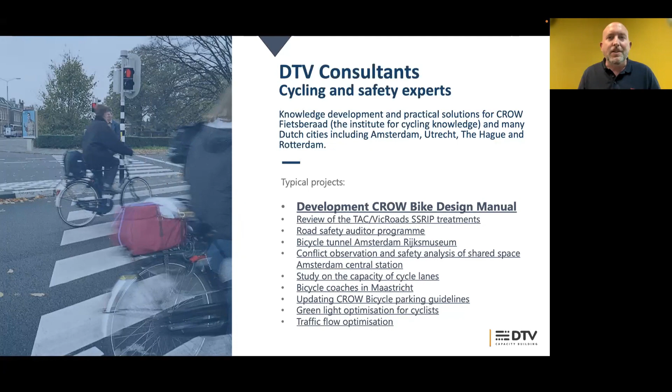We do a lot of studies in the Netherlands, Europe, and beyond. And one of the things that we combine this cycling expertise with is our knowledge to do trainings and knowledge sharing. So we have been doing trainings for professionals for more than 25 years now. So we combine didactical skills with our subject matter expertise. And we, in the end, create smiles, as you can see on this picture.

We are a member of the Dutch Cycling Embassy, so perhaps you became aware about this opportunity through their networks. It's an umbrella organization that collects a lot of knowledge and expertise, a lot of organizations, public, private knowledge, etc., from the Netherlands about cycling.

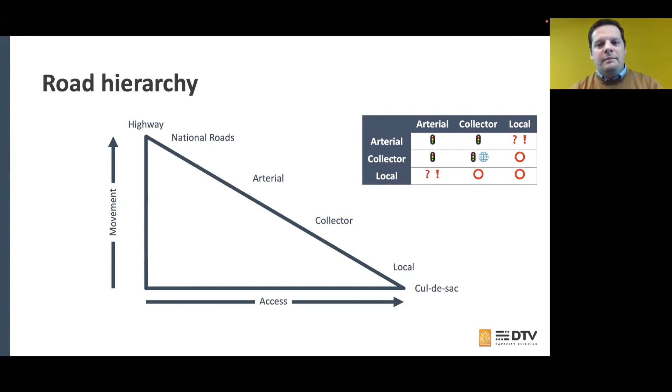And then local roads are smaller roads with less traffic. Normally, you wouldn't put a traffic light where two local roads connect to each other. But coming from Buenos Aires, as I said, the road hierarchy here is like a typical grid city, a typical American city. You can see roughly every 100 meters there's one road, mainly one-way roads.

And then in the top right, you can see the highway, the entrance to the city. And then you meet the first arterial roads. Then you meet the avenues, if we call them like that there. Those are mainly collector roads, and then all of the rest of the roads are mainly local roads. But what happens with the traffic light placement? Here you can see these stars that I put are the only intersections in this part of the city that do not have a traffic light.

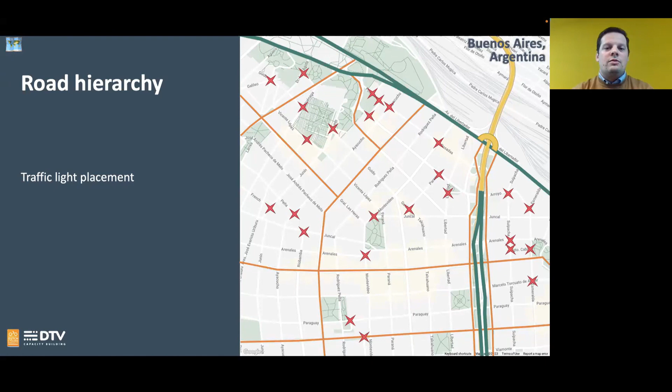So mainly in grid systems, the traffic light is mandatory or really necessary because it needs to handle traffic that goes every way. So here is a summary of where, in Buenos Aires and in many other grid systems like New York and other big cities, the traffic light is placed.

And in most cases it's pretty much everywhere because of the amount of traffic that goes through there, and also in a way the lack of road hierarchy, because any car could take any road, so all the roads become busy, and you need traffic lights to allow different vehicles to cross the intersection.

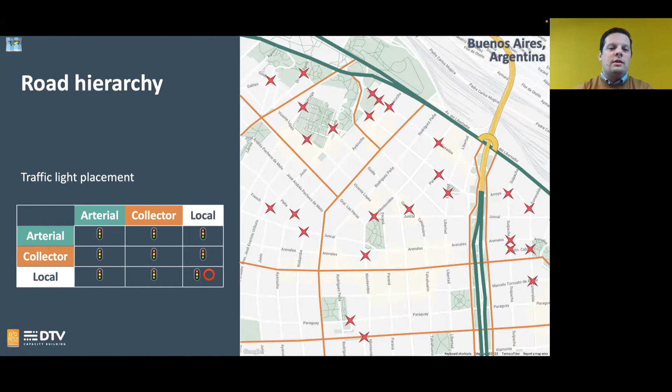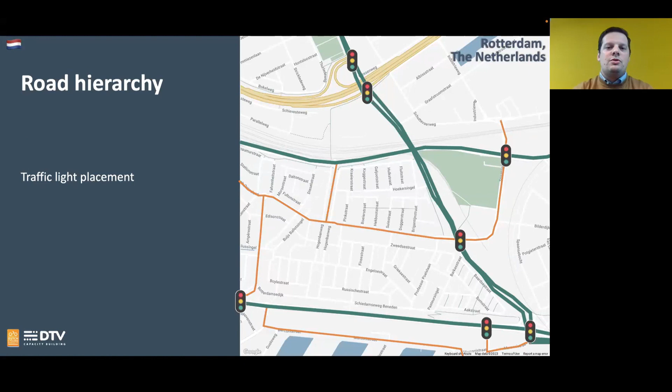So there are other big intersections, like a collector with another collector. And in those cases, there are other types of solutions, like for instance a roundabout or a grade-separated solution, as you see with the two arterials on the top right below the train tracks.

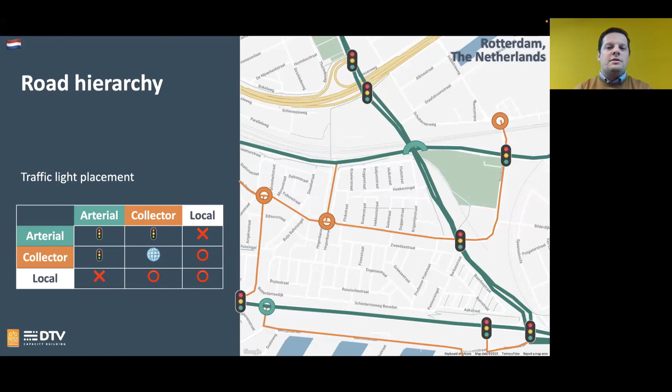So in the Netherlands, you have fewer traffic lights, further apart from each other. And of course, those intersections are bigger, more important intersections. So you need more robust traffic light regulation to handle this sort of intersection. So that's the idea behind the traffic lights of the Netherlands and the rest of the world.

Now, regarding the components of the traffic light, in the rest of the world you mainly have one traffic light for each direction of travel. It's not one per lane. So multiple lanes share the same traffic light, the actual light. Then in most cases, in the grid system, of course, left turns are not really possible at each intersection on each traffic light.

Usually we use the city loop: you take a right turn, a right turn, and a right turn instead of one left turn, because there are a lot more conflicts with left turns. And then there are mainly dedicated pedestrian lights where there is a pedestrian crossing.

And then, of course, at other, bigger or different sorts of intersections, you do have a dedicated left turn lane, and you also have pedestrian push buttons to ask for a green light for pedestrians. But this is not used at every intersection in the world.

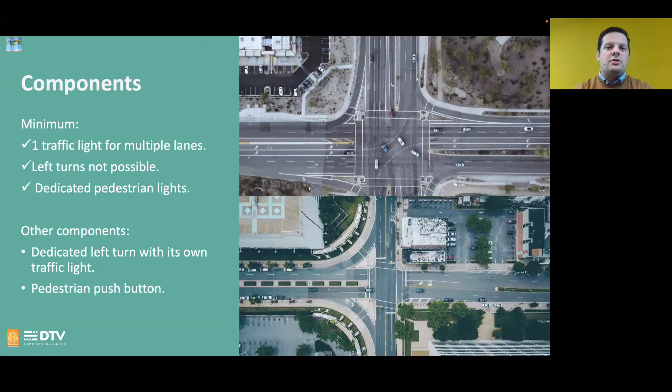But of course, going back again to the Netherlands case, you typically have one traffic light per lane. So each lane has one traffic light dedicated to that lane. We will look a little bit later at why you need one traffic light per lane. You tend to have dedicated turning lanes because, as I told you, these are more robust, bigger intersections, so you need more space to handle different sorts of traffic.

And also because the intersections are further apart, if you don't have the left turn, the route the vehicle has to take is a lot longer than with the normal grid. So it's really useful to have left turns. Then you always have dedicated pedestrian and bicycle lights.

So the traffic light knows when there is a vehicle approaching the intersection, how long has it been there, and what amount of vehicles are in each lane and what they want to do. That's also why you need dedicated turning lanes.

And then you have in all intersections also push buttons above the induction loops that also detect cyclists. You have push buttons for cyclists and for pedestrians. And then in the case that there is a high speed lane or something similar to that for buses and trams, you have a dedicated light for trams and for buses.

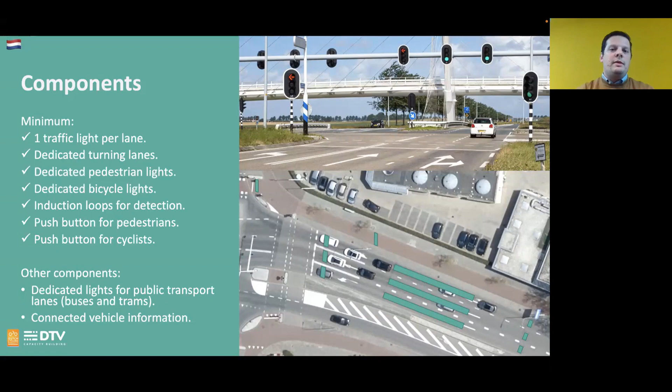And finally, with the new intelligent traffic lights in the Netherlands, you also have the ability to connect with smart cars. So the smart car sends a notification to the traffic light, and then the traffic lights know before the induction loops that this sort of vehicle is coming to the intersection. So that's also a huge difference with other types of intersections.

In terms of cycle times, as I told before, the grid is one of the main definitions of the system of traffic lights in main cities. What you usually have is big avenues, those are the yellow arrows, and then smaller roads in between. So what you need to do to get that system moving and not a gridlock, as it is called, you need to coordinate those.

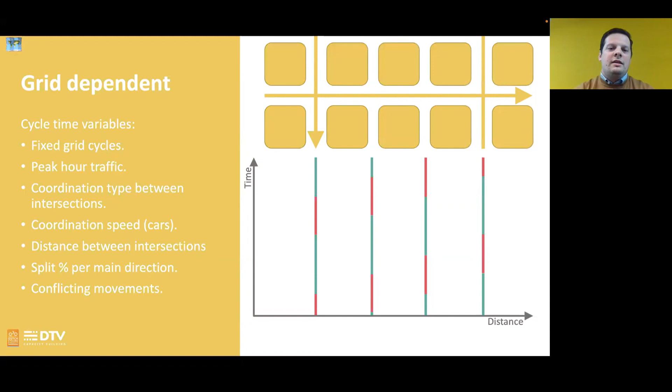So to make that coordination, you need, of course, distance and time. Then you need to know where those intersections are placed, and you need to give them green and red at different times in between each other. And that gives you in general a coordination speed between the traffic lights, so the cars can move through multiple intersections in one go. They don't have to stop every 100 meters. That's also a little bit more efficient. But that also takes a little bit of time and a little bit of coordination.

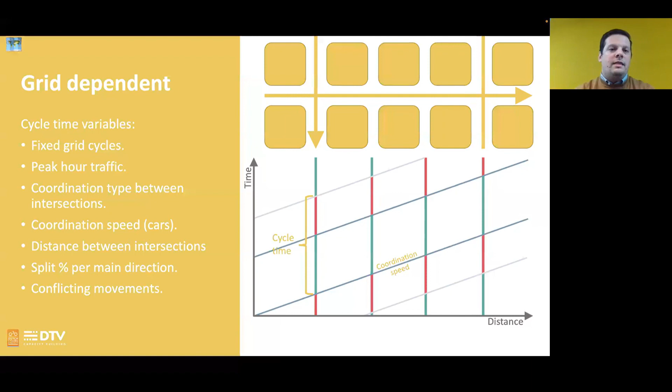So you need to coordinate mainly the big avenues, the collector roads, and then the local roads in between. They get the time they get, and there's not much you can do about those. You can compensate with longer cycles or shorter cycles, but once the grid is defined and the cycle time is defined, mainly between 90 or 120 seconds, that's the cycle time you have in the whole area of the city. And it's mainly defined through the peak hour of traffic, the coordination, the speed that the cars could travel in those areas, and the distance between the intersections.

In the Netherlands, as I talked about before, you have different induction loops, and you have a traffic dependent system. You can send notifications to the traffic light knowing that a car is there, a pedestrian is there, a cyclist is there, and you can know that before the actual vehicle or pedestrian reaches the intersection. So in this case, the cycle times in the Netherlands are constantly being calculated and changed. So maybe one cycle time is 67 seconds, and the next cycle in the same traffic light is 72 seconds.

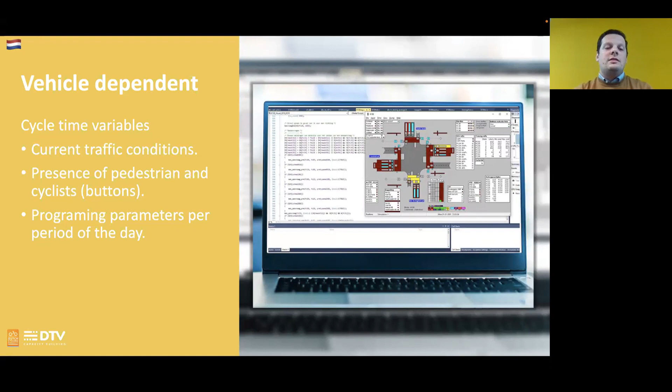But that's mainly because each step in the traffic light is calculating how many cars are there, how many cyclists are there, which directions are in conflict in each movement, and you have different parameters that you can change. How much time you want a pedestrian or a cyclist, or a vehicle or a bus, to be waiting there. So to make it as efficient as you can, you constantly iterate and change how long the cycle time is for each traffic light at each instance. That's a big difference. And another difference is the clearance times.

Sorry, a little bit of water.

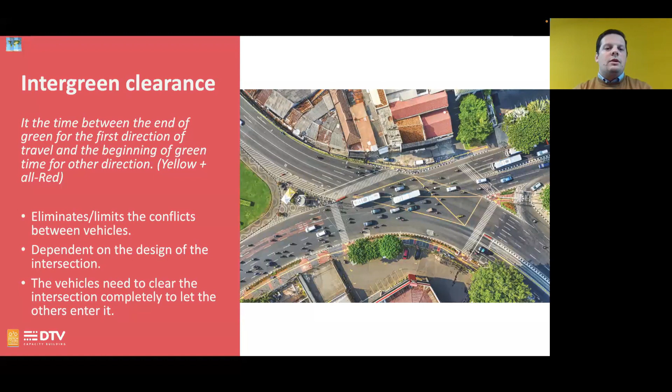In general, of course, we use the intergreen time, the intergreen clearance, and it's the time that passes between a car leaving the intersection fully and the other direction of travel being allowed to go. The idea behind these intergreen times, these clearance times, is to eliminate or limit the conflict between the vehicles, and of course, pedestrians and cyclists. It tends to depend on the design of the intersection in general, the size and the amount of lanes, etc. And in general, internationally, the vehicle needs to clear the intersection completely before others are allowed to go in.

This shows ideally what is the clearance time and what is the conflict zone for this sort of intersections. What you can see is that internationally, the time calculated is for the whole lanes crossing the whole other road before the next road is allowed to go.

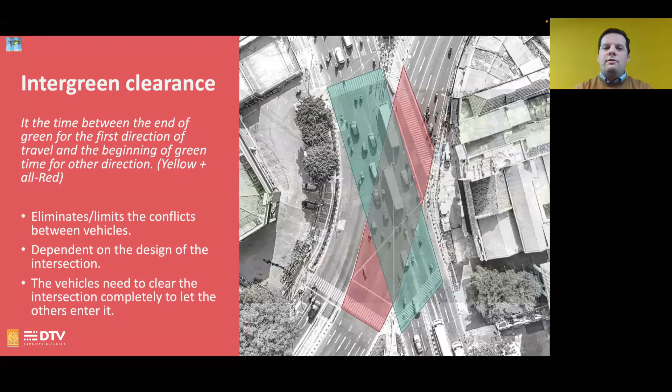So that difference is kind of big if you also compare it to how the Netherlands calculates its intergreens and clearance times. In the Netherlands, what we tend to do is also to eliminate this conflict between the signal groups, not for the whole direction of travel, but specifically which lane is being used at what time. So you can calculate the intergreen time between a left turn and a straight lane, or a pedestrian with a straight lane, or a cyclist with a right turn, etc.

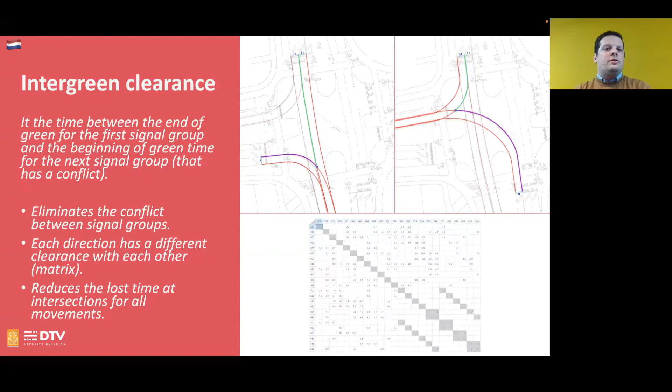Now, finally, handling these potential conflicts that we talked about. Internationally, the main rule is the right of way. In general, when the car is turning right and a pedestrian is on the zebra path, the pedestrian or the cyclist has the right of way. This proves to be a shared space in the crossing. It's not something completely safe. You depend on the vehicle to respect the right of way and actually give way to the pedestrian or the cyclist. So it is safe, because we live in cities and we don't die every single day. But in truth, it's not really a conflict-free interaction between cyclists, pedestrians, and vehicles.

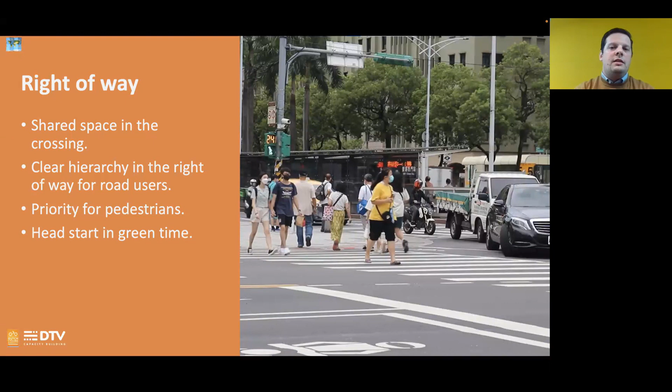And sometimes internationally, to make this priority more explicit, there is a head start in the green time for pedestrians and cyclists. In this case, for example, this is what normally happens. In the bottom part, you have a straight ahead and a right turn, and they have green at the same time as the cyclists and pedestrians on the right side. With the green start, you first get a little bit of green for the pedestrians and cyclists, usually 2 or 3 seconds, and then you give way to the rest of the cars. This provides an extra level of security, of clearance for the pedestrians and cyclists.

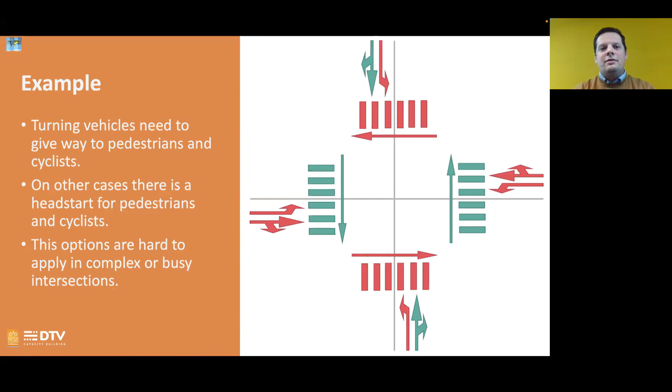But it's important to mention that this is just at the beginning of the cycle. So if a pedestrian arrives 2 or 3 seconds after the beginning of the cycle, then they're in conflict with the vehicles turning. So that's also kind of problematic. This sort of solution is complicated when you have bigger and more complex intersections. And for that, I have a different solution used in Buenos Aires.

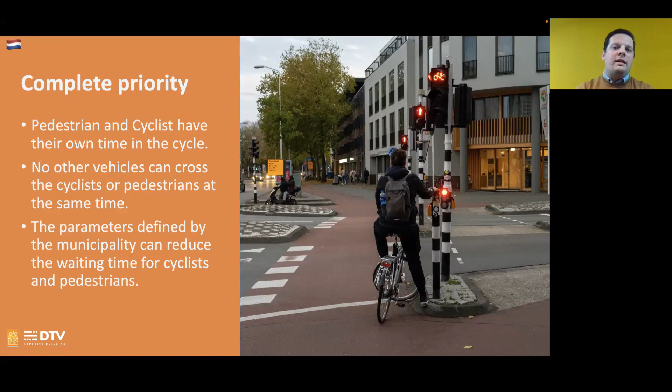These parameters can be changed. How much time the pedestrian or cyclist needs to wait at the traffic light can be calculated each cycle and adjusted with parameters handled by the municipalities, to make life better for cyclists and pedestrians at each intersection.

This is an example of how a traffic light works in the Netherlands. You have multiple ways of travel, and multiple signal groups go at the same time. It's not always the same green time for the same movement, because the system knows how many vehicles are in each lane, so it can give exactly the amount of time needed to clear the way and then let the other ones go.

Maybe you can go back one to play the animation once again, so you can pay attention and see how you never have a green in conflict with another pedestrian or another vehicle in this case. If there is a conflict in the animation, that's my error, but it shouldn't be.

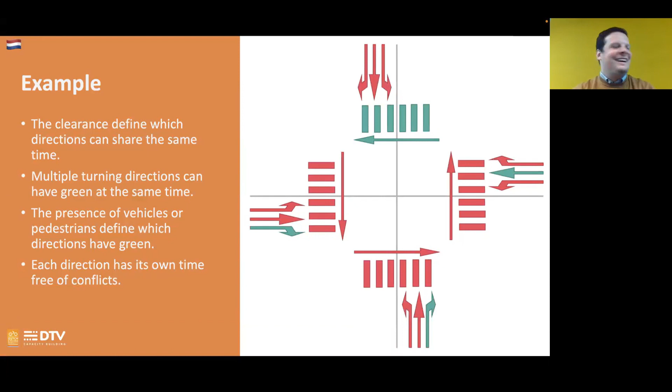So as a summary of what I've talked about - maybe it was a little more than 20 minutes, but the idea was to make it fast. Placement is important because a traffic light needs to be placed only where necessary. All intersections can generally be solved with priority rules and placement. Cyclists and pedestrians should have priority at all intersections, and in the Netherlands, if there's no traffic light, cyclists and pedestrians have priority. That's why it's nice to cycle here.

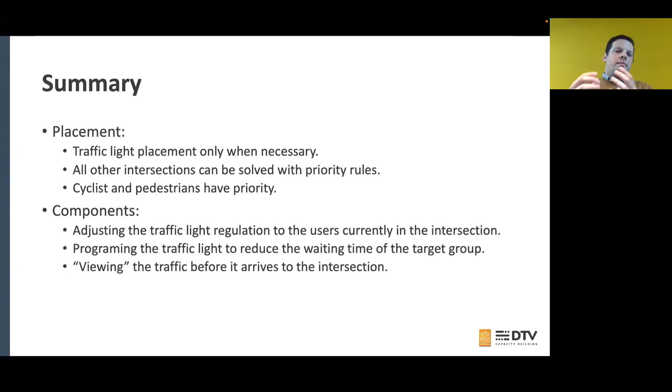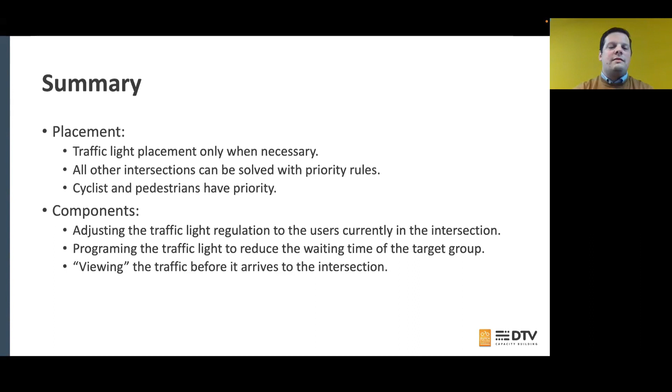The components let you adjust the regulations at each intersection at each moment. You can program the traffic light to reduce waiting times for target groups, specifically for cyclists, reducing the amount of time they need to wait at the intersection. Because you actually know when traffic is arriving, you can give them green before they arrive, so cyclists don't even have to stop. That's something we're also working on at DTV.

Cycle times are constantly calculated and adjusted based on actual demand at each point. Shorter cycle times also reduce waiting time for all users, specifically for cyclists and pedestrians, but also for cars it's a better solution. Multiple parameters can be adjusted to reduce the waiting time at the traffic light for each vehicle.

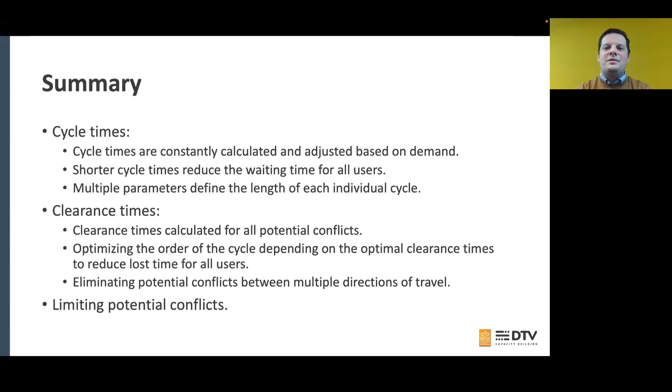How you calculate the clearance times is really important, to actually allow the vehicle in conflict to leave the intersection before another vehicle or person moves into it. It's important to calculate them really well with the correct speeds. The final idea is to limit the potential conflicts between cyclists, pedestrians, and other vehicles - those are the main points I wanted to share as a summary.

That's it. Yeah. Thank you very much, Gonzalo.